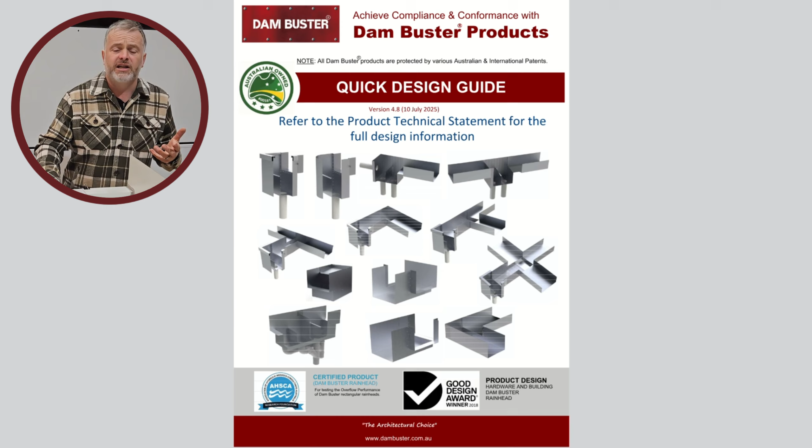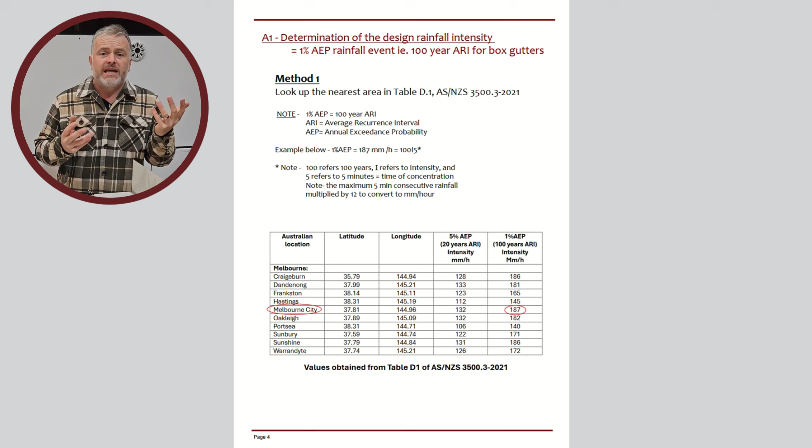So I'm just going to point you in the direction of this: you go onto the Dam Buster Rainheads website, you go to the technical download section, and then you scroll down until you find the quick design guide, which is where I find myself going most of the time when people ask me these questions. It runs through how to size a box gutter for any location in Australia. So the first thing you have to determine is where you are and what the flow rate for that particular place is.

Now, that's pretty straightforward because it's worked out from longitude and latitude, but I'm going to make it really easy for you. I'm just going to choose Melbourne as an example. So the postcode for Melbourne has a flow rate of 187 millimeters per hour. That's worked out by the Bureau and put into the Australian standards. And what that's telling you is that you can expect in a once in 100 year period, or a 1% AEP, that particular site could be subjected to rainfall equivalent to that.

Now that would equate to 15.6 millimeters of rainfall in 5 minutes. That's really quite a lot. Interestingly, a once in 1 year rainfall in the postcode of Melbourne would be 5 millimeters in 5 minutes. So what you can see straight away is there's not a huge difference between once in 100 and once in 1 year rainfall. It's simply 3 times the amount. So when you are out there in November in Melbourne around Cup weekend and you get those heavy downpours, you're probably looking at a once in 1 year rain event.

And we get a lot of problems with buildings in and around those downpours. But a once in 100 year rain event is 3 times the one you're probably used to having, and so it causes a lot more problems. But box gutters need to be able to keep buildings safe, even in really, really heavy rainfall. The way box gutters do that is quite interesting, and not many people seem to understand this.

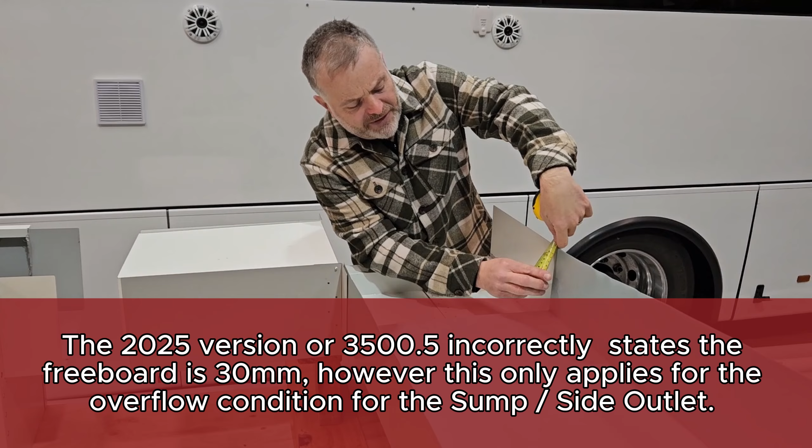A box gutter, just because it's designed for a once in 100 year rainfall, doesn't mean that if it has a once in 101 year rainfall it's going to fail. The reason is because box gutters are created with what's called freeboard built into them. So there's actually a safety measure built into the box gutter, which is quite significant. In the instance of a box gutter running to a rain head, we know that safety measure is 60 mil. So if I'm looking at this box gutter here, there's a 60 millimeter safety margin which the flow will never exceed, even in a once in 100 year rain event.

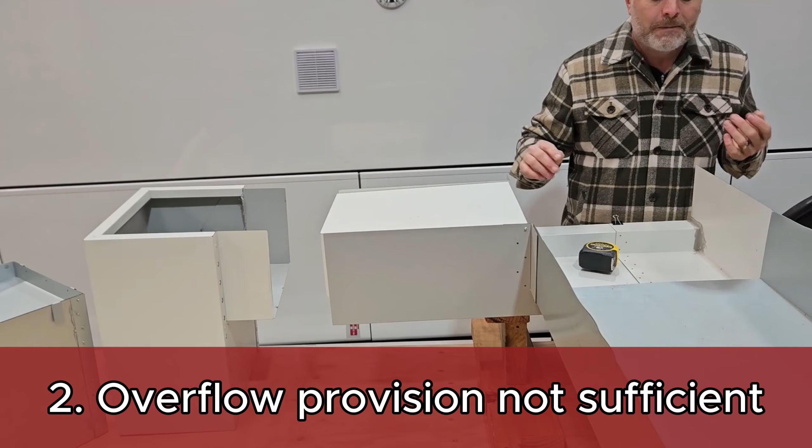And when we come across buildings flooding all the time during this, there's only really two reasons why they flood. They don't have enough freeboard, so enough left over when it's raining really heavily. And secondly, the overflow provision downstream is not good enough. So they're the things you really have to be careful of.

The actual sizing of the box gutters can be made really easy. And like I say, if you go to the quick design guide, you just need to learn how to size the flow rate coming in into liters per second, and then the world is your oyster. Our products are all geared around liters per second. Once you know that common factor, you can size the downstream devices, and you can really, really easily size box gutters.

What I say to people is, if you're in Melbourne, the flow rates, as I mentioned before, the city CBD is 187 millimeters per hour. Down the surf coast, it's going to be a little bit less. In the north of the city, sometimes it can be higher, around 195, say Montmorency, 195, and then it tails away again as you go down the peninsula.

And so really the flow rates in Victoria never exceed 240 millimeters per hour, and in the Melbourne metropolitan area, 200 millimeters per hour. So I'm going to simplify it and say that most of you are working in metropolitan areas. So if you go metropolitan area for Melbourne, 200 millimeters per hour. Sydney obviously going to be different, higher. Same with Brisbane. But let's just talk Melbourne at the moment.

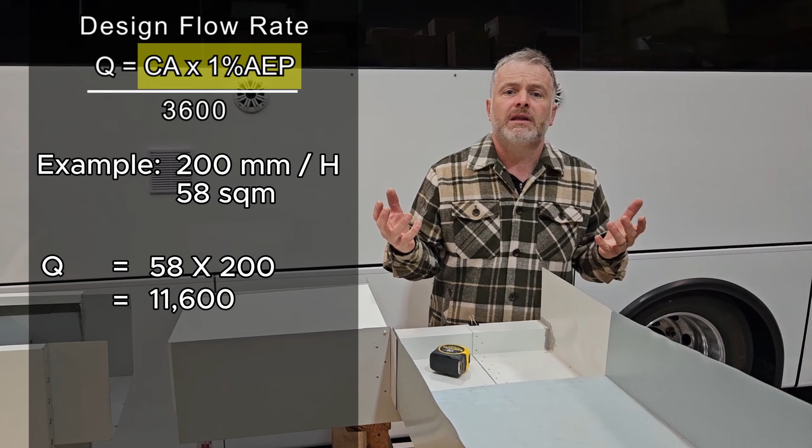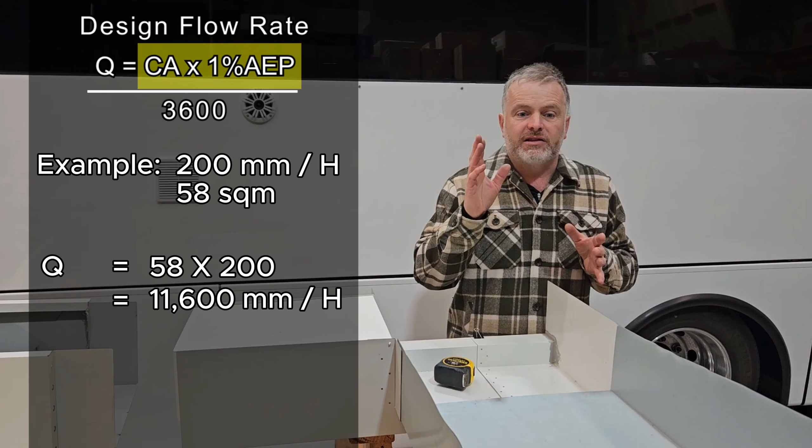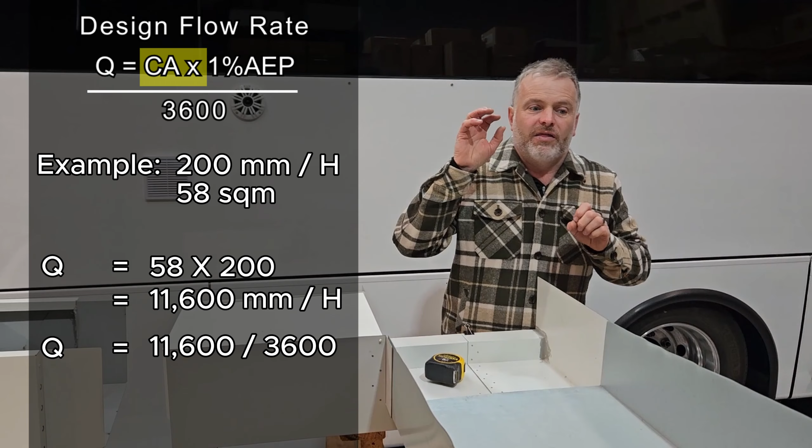Now that number, remember, is giving it to you in millimeters per hour, and you need liters per second. So the way that we change that is by dividing it by 3,600, which sounds confusing, but it's actually just how many seconds there are in an hour. So you times the square area by the flow rate, 200 millimeters, and divide by 3,600.

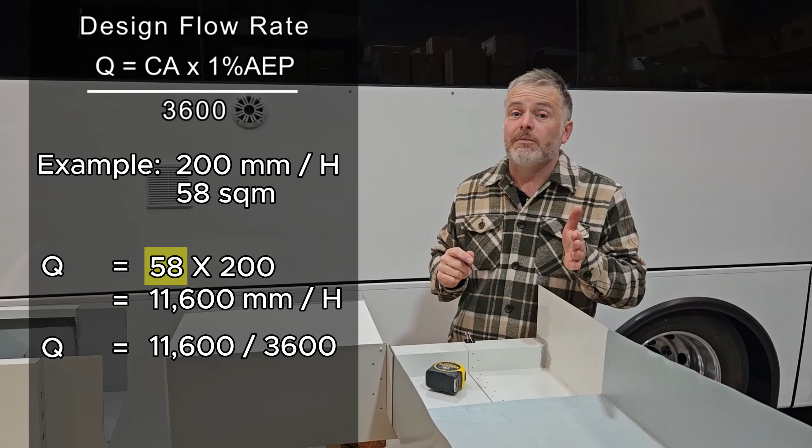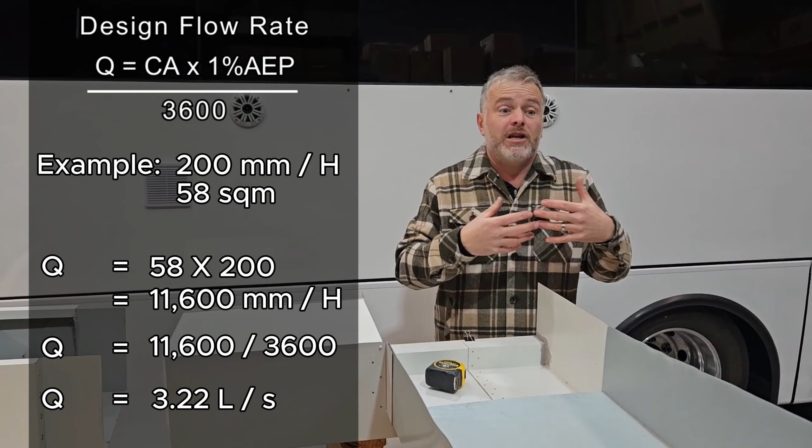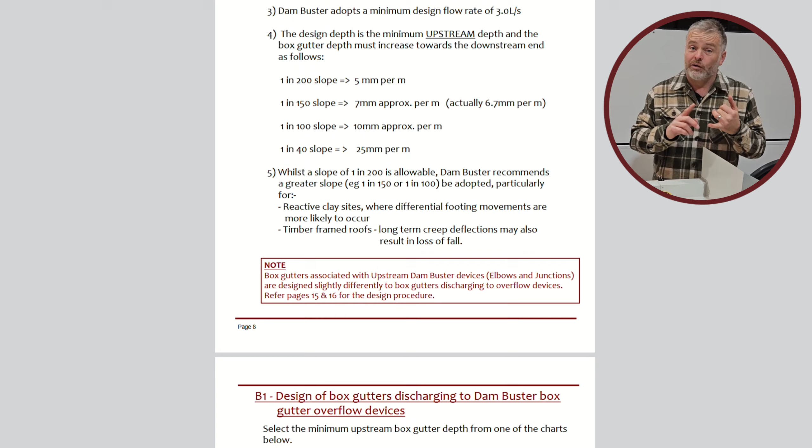Now, if you do this just off the top of your head, just go 58 square meters times 200 millimeters per hour, divide by 3,600, and you're going to get a flow rate, for the minimum sort of flow area of a roof, just over 3 liters per second. Okay, so once you have that number, you can go to the Dam Buster charts, which are in our quick design guide, starting on page 8 and running on from there, which will give you the size. It's this fantastic graph.

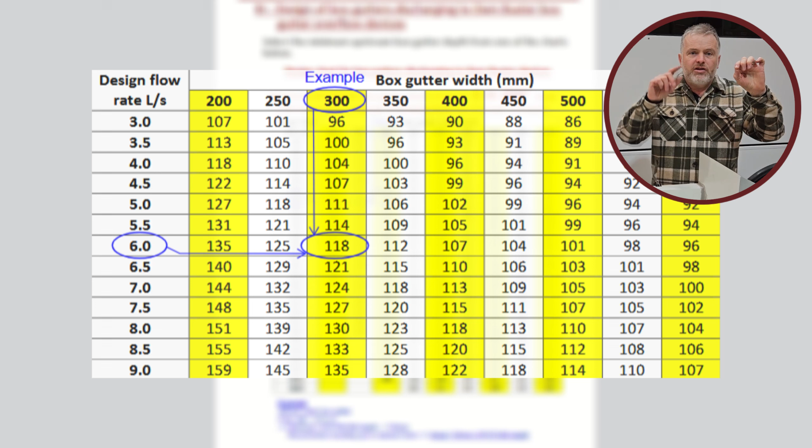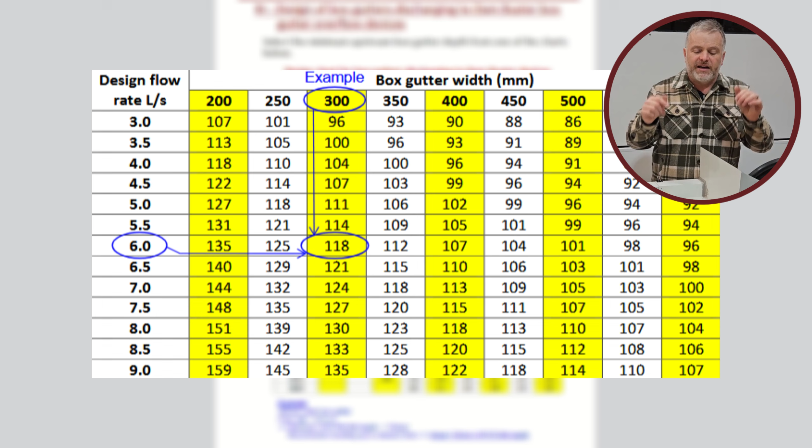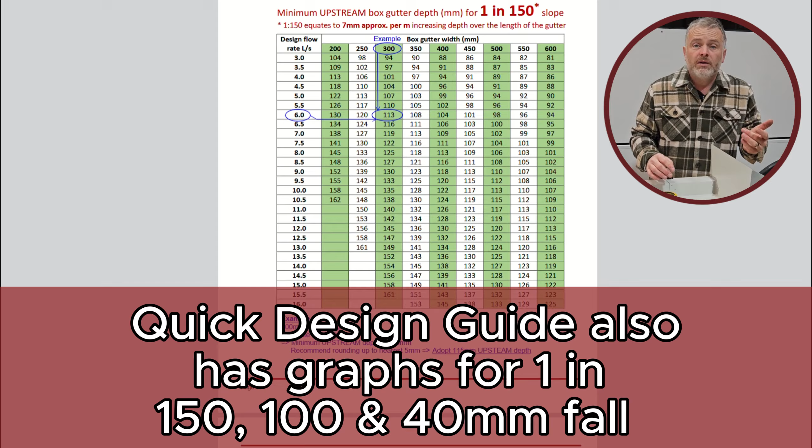And if you know how many liters per second is running through a device, and you know how wide your box gutter is, in this instance it's 450 mil wide, it might be 300 mil wide, 200 millimeters wide, you simply look across, find out on the graph, and it gives you the minimum measurement upstream, including the freeboard. Then you simply add, if you're doing 1 in 200 fall, 5 millimeters for every meter that you go downstream. That gives you your downstream measurement. So you've got your upstream measurement and your downstream measurement.

And really at that point there, you can size your box gutters incredibly well, and then they adapt to our devices on the downstream end. And you don't have to do anything much with our devices because they're geared around flowing into that flow rate that you're determining from your drawings.

So enabling you to do the DTS component really easily, that's like one of the huge benefits of using the Dam Buster system. And secondly, having a predictable and reusable and scalable product which enables you to be compliant and build the type of buildings that people are asking you to work on.